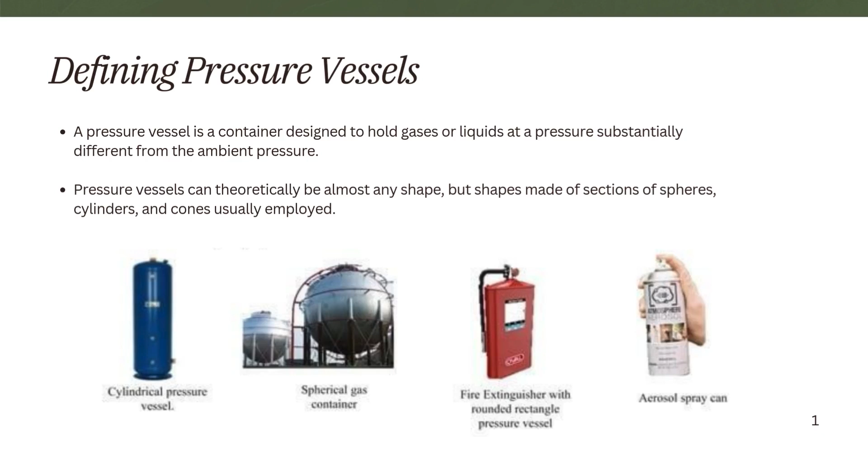A pressure vessel is a container designed to hold gases or liquids at a pressure substantially different from the ambient pressure. Pressure vessels can theoretically be almost any shape, but shapes made of sections of spheres, cylinders, and cones are usually employed.

Pressure vessels are used in a variety of applications in both industry and the private sector. They appear as industrial compressed air receivers and domestic hot water storage tanks. Other examples include diving cylinders, recompression chambers, distillation towers, pressure reactors, autoclaves, and many other vessels in mining operations, oil refineries and petrochemical plants, nuclear reactor vessels, submarine and spaceship habitats, pneumatic reservoirs, hydraulic reservoirs under pressure, rail and road vehicle air brake reservoirs, and storage vessels for liquefied gases such as ammonia, chlorine, and LPG.

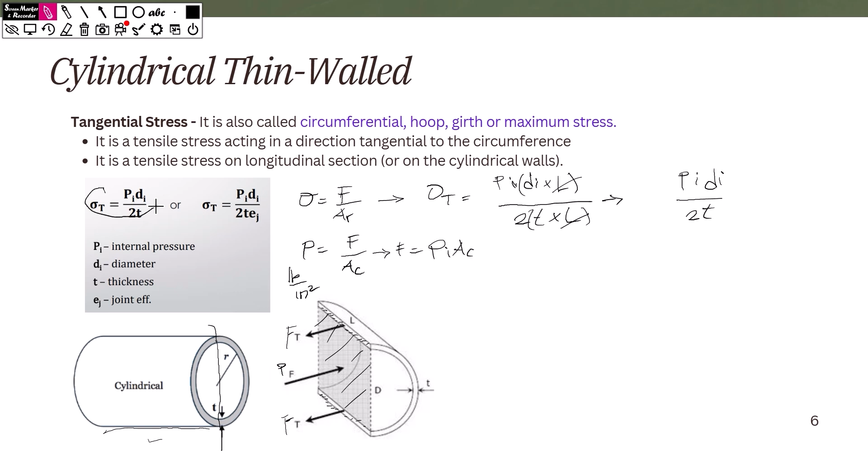Okay, inside diameter times the length, area covered, yung resisting area natin, itong part na to. Kasi ito yung pumipigil, di ba? Ay yung nagre-resist, bago siya masira yung cylindrical vessel natin. So that is 2, dalawang thickness times the length. Thickness times length.

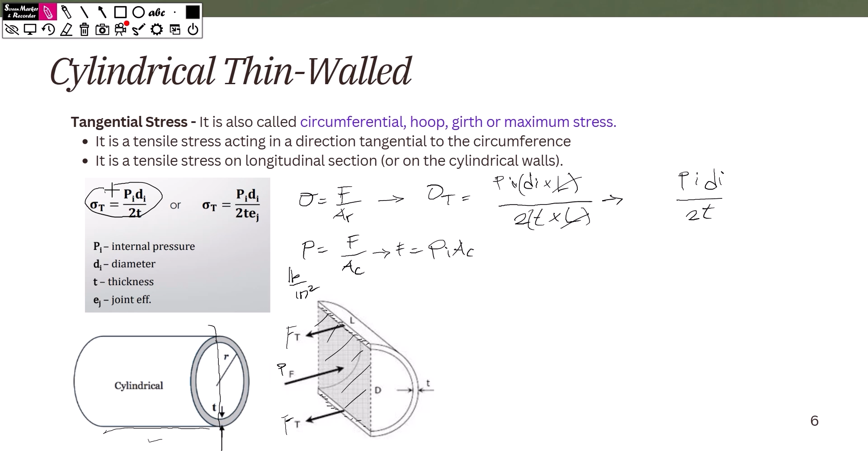So in this case, makikita natin, makakancel lang yung length. Cancel yung length. So matitira formula natin, inside pressure, inside diameter, over 2 times the thickness. So yun yung pinanggalingan ng formula natin na itong part na to. Tangential stress is equal to inside pressure times d, inside diameter, over twice the thickness.

So next tayo. Under cylindrical thin walled pa rin, meron tayong pangalawang stress, yung tinatawag nating axial stress. It is also called diametral, longitudinal, or minimum stress. So kanina, maximum stress yung tangential. Dito sa axial stress, ito yung minimum. Sabi pa rito, it is a tensile stress acting in the direction of the axis or longitudinal to the circumference. It is a tensile stress acting on the transverse or circumferential section or on the ends of the vessels.

So, ito yung formula niya. Kung mapapansin mo kanina, pi d, pressure, inside pressure times diameter over 2t, but this time naging 4t. Kasi ito yung axial niya. So, axial, ibig sabihin dito, sa part na to. Okay, sa part na to. So, kung kanina, nahati siya rito under ng tangential. In this case, ang hati natin dito sa part na to. Okay? So, ito yung kalalabasan niya.

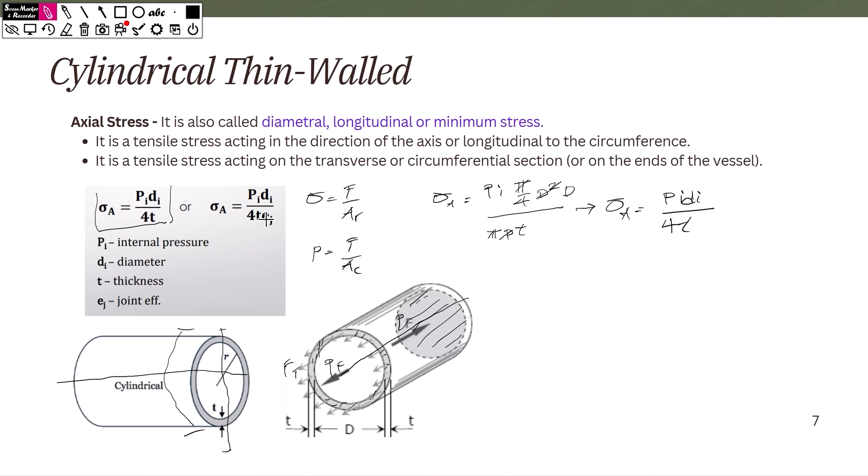So ito yung resisting area natin, di ba? Itong circumference na to, yung part na yan, circumference lang yan, that is pi d, inside diameter times the thickness, para makuha natin yung resisting area, di ba? Now, pero kakancel lang itong isang d, cancel itong isang d, may matitirang isang d, cancel itong pi. Therefore, formula natin dyan, axial stress is equal to inside pressure, inside diameter, lagyan natin dyan yung 4, pupunta sa baba, at then yung t. So yun yung pinanggalingan ng formula natin, that is axial stress.

Okay, and again, if may joint efficiency na binigay, ilalagay lang natin siya sa divisor. But kapag wala, assume lang natin ulit na 100%.

So next tayo, spherical thin walled. Kung kanina nasa cylinder tayo, ngayon nasa spherical. So stress of spherical vessel, sabi dito, the tangential stress in a spherical vessel is also equal to its axial or longitudinal stress. So ibig sabihin pala, ito kasing bilog, saan ba siya masisira itong sphere? Sabihin na natin dito, kahit dyan mo siya ikat, kahit pag ganito mo siya ikat, okay, kahit pag ganito mo ikat, kahit anong cut yung gawin mo dyan, ito pa rin yung lalabas.

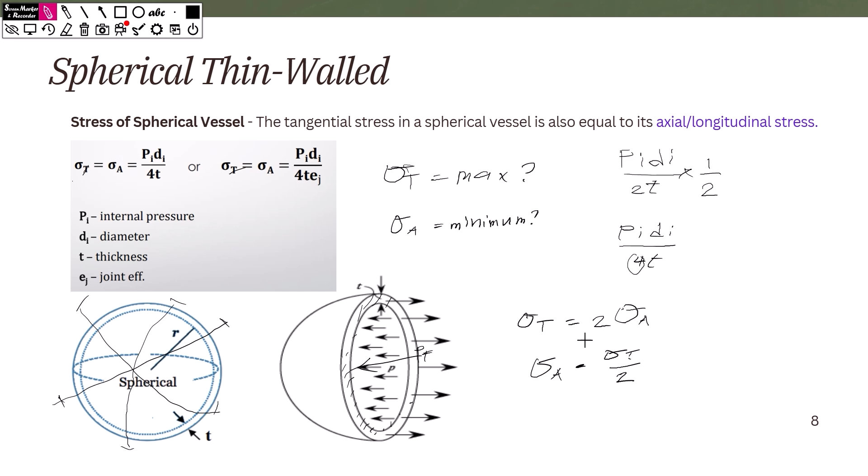Wait lang. Papapansin mo pala, bakit sir? Bakit po yung thickness ay yung tangential? Bakit yung tangential ay maximum? Bakit siya maximum stress? Tapos yung longitudinal o yung axial minimum stress, di ba? Minimum, bakit siya minimum? Tingnan natin, tama ba? Sabi si axial yung minimum, tangential yung maximum. So bakit ba? Bakit naging ganon? Diba ang formula ng tangential is inside pressure, inside diameter over 2t. Eh yung axial, inside pressure, inside diameter over 4t. So kung mapapansin mo, si tangential pala...

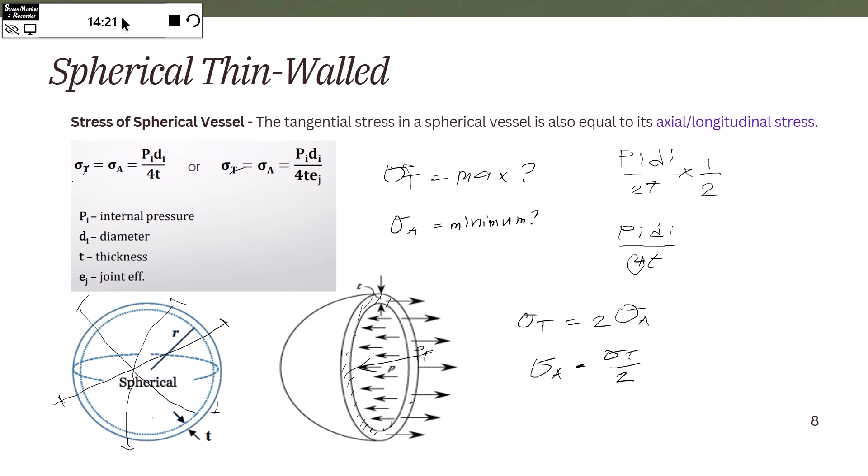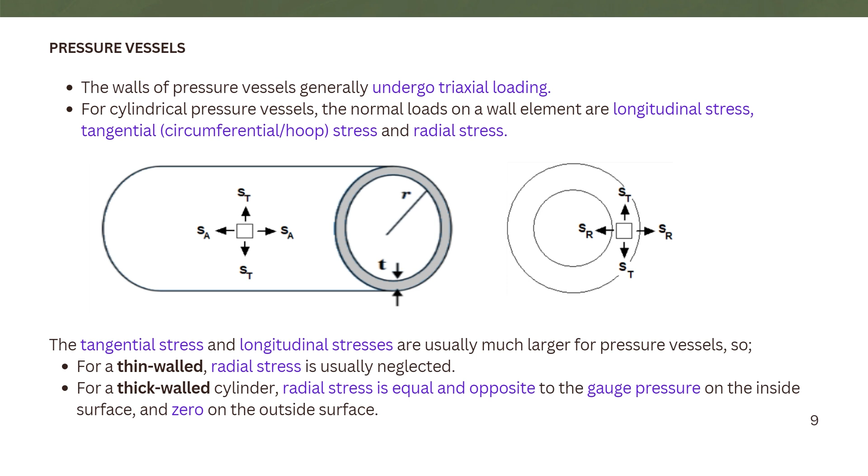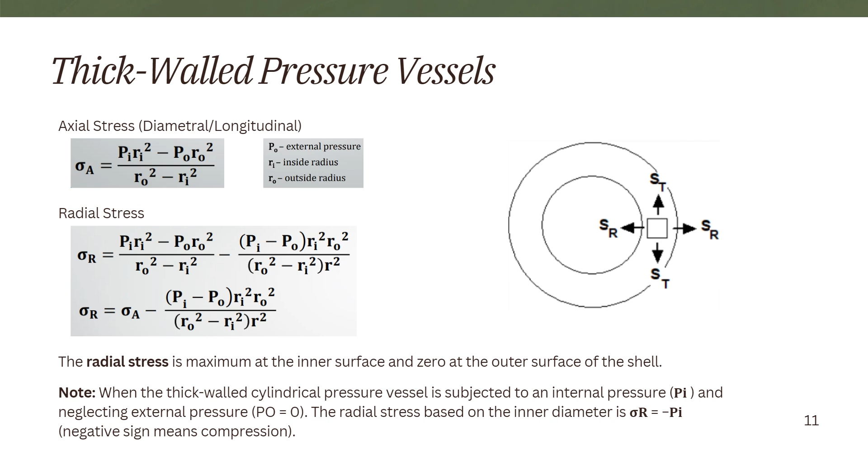For tangential stress, also called circumferential, hoop, or girth stress, it's the same as radial stress, but this time, instead of subtracting, we add the formula of axial stress.

So the formula for axial stress, plus internal pressure minus external pressure, times inside radius squared times outside radius squared, all over outside radius squared minus inside radius squared, times r squared.

Same as before, the r depends on the problem, on what is given or what is desired — either internal tangential stress or external tangential stress. That's what it depends on, okay?

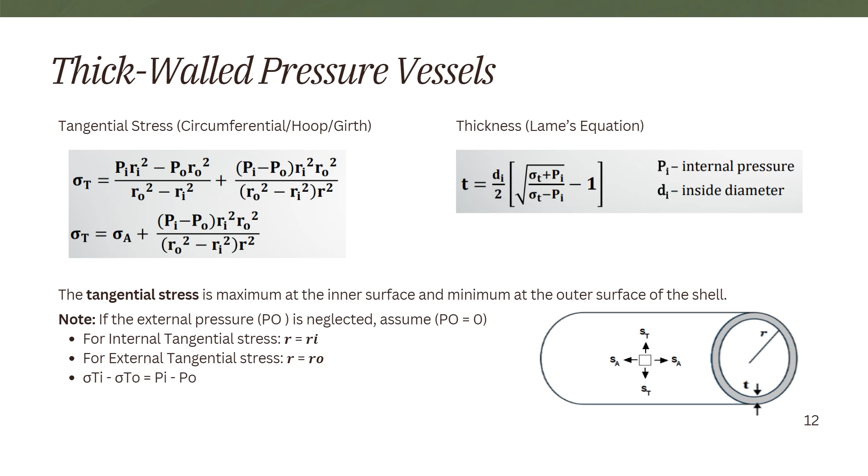So, sample problem number 1, let's try this. The wall thickness of a 4 feet diameter spherical tank is 5/16 inches. Calculate the allowable internal pressure if the stress is limited to 8,000 psi.

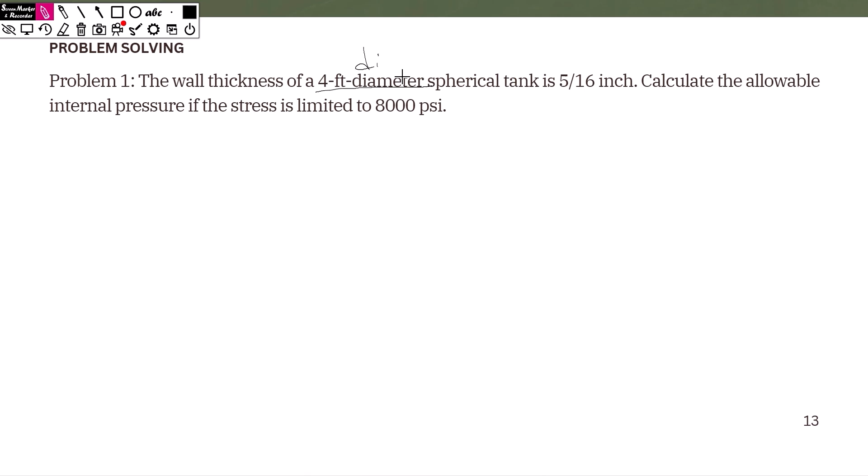We were given a 4 feet diameter, which is the inside diameter of the spherical tank, with a thickness of 5/16 inches. We need to find the allowable internal pressure, given the spherical stress.

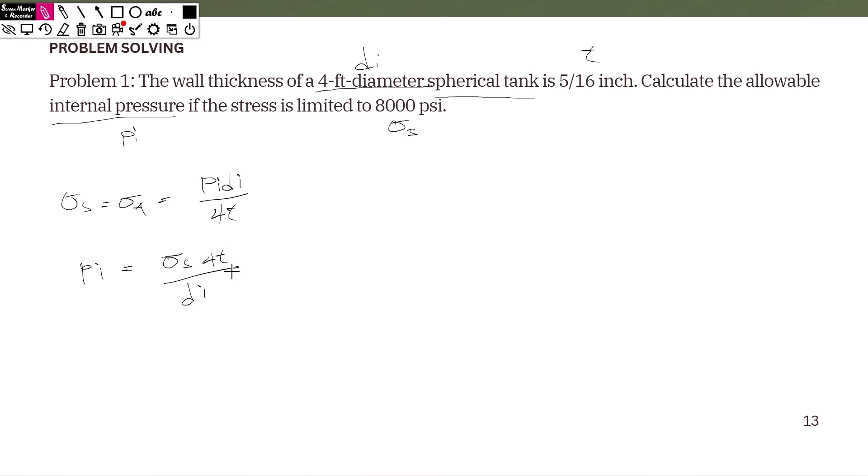Let's solve. We know the formula for spherical stress is the same as for axial stress: internal pressure times inside diameter over 4 times thickness. Rearranging to isolate internal pressure, we get spherical stress times 4 times thickness, over the inside diameter.

Let's substitute the given values: 8,000 psi times 4, times the thickness of 5/16 inches, all over the inside diameter of 4 feet. Let's convert — 1 foot equals 12 inches — so the feet units cancel, the inches cancel, leaving psi, which is what we're solving for.

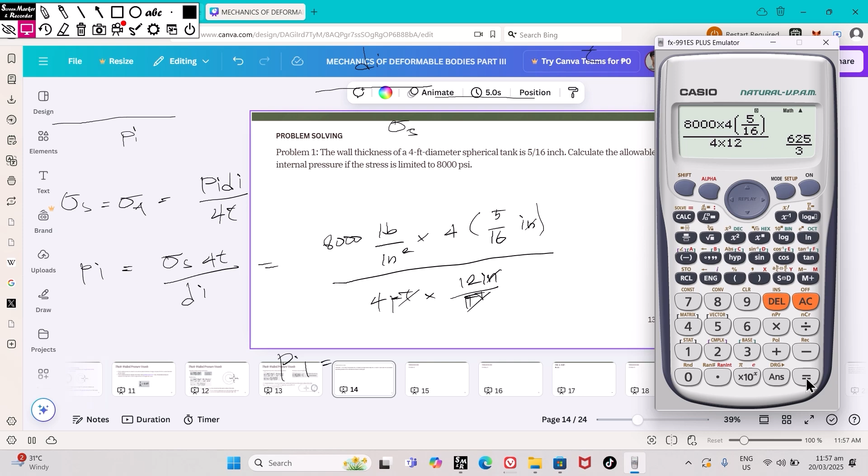Internal pressure equals, let's calculate: 8,000 psi times 4, times 5/16 inches as the thickness, times 12 for the inside diameter. Our answer is 208.33 psi.

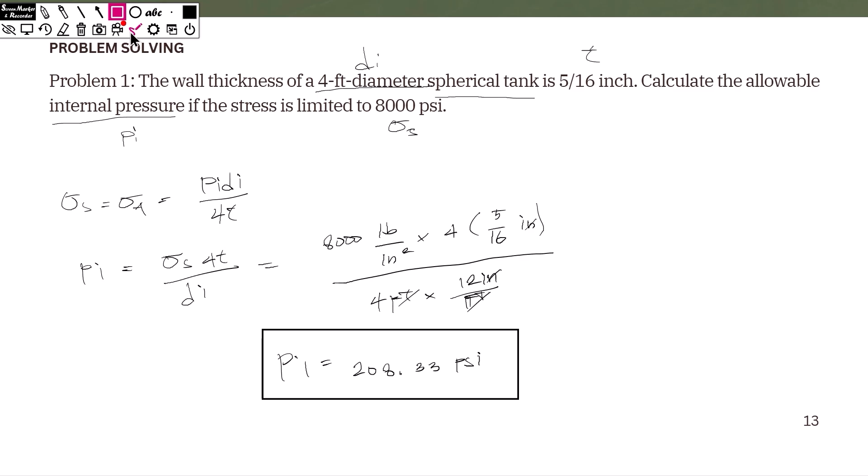So this vessel is to carry a gas at a pressure of 1,400 psi. The diameter of the vessel is 2 feet and the stress is limited to 12 ksi.

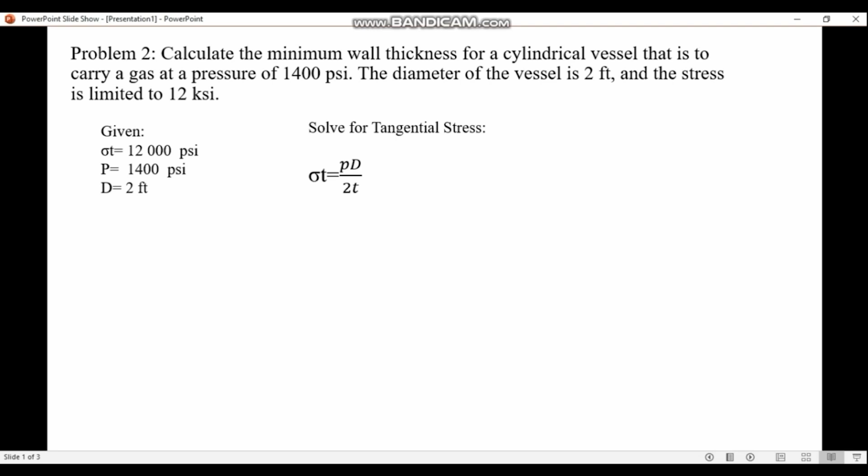The thickness. So where can we get the thickness? We can get it from the formula for tangential stress, which is this: tangential stress equals pressure times diameter over 2t. Okay, so it's just substitution.

So, 12,000 pounds per square inch equals 1,400 pounds per square inch times 2 feet. Now I converted the 2 feet into inches so the units cancel: 2 feet times 12 inches, over 2t. And that's how we find the thickness. So let's just solve using the formula.

So, 12,000 is equal to 1,400 multiplied by 2 feet. Convert the length into inches.

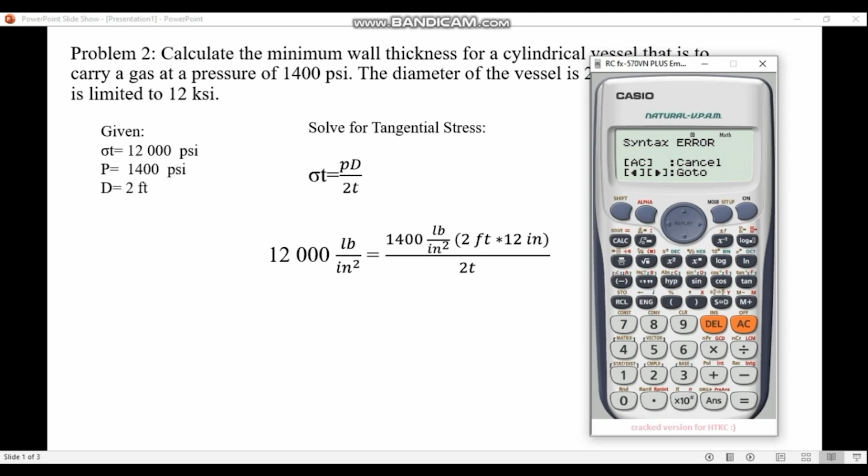Let's check. Thickness is 1.4 inches. Into the next slide. Okay.

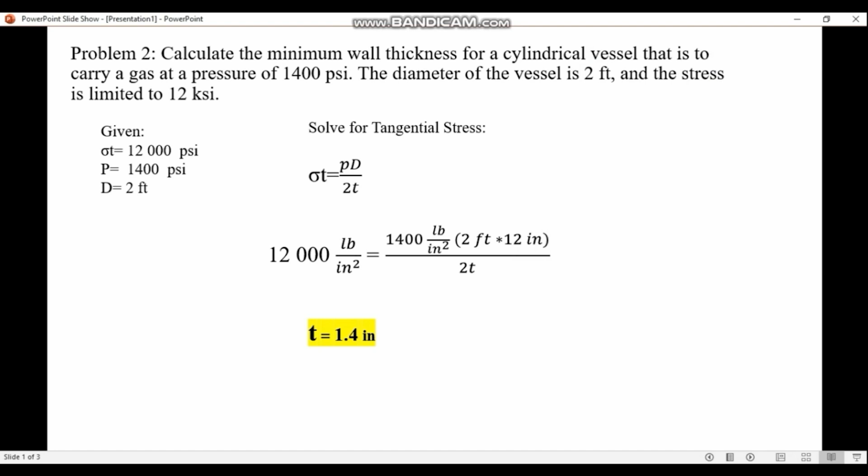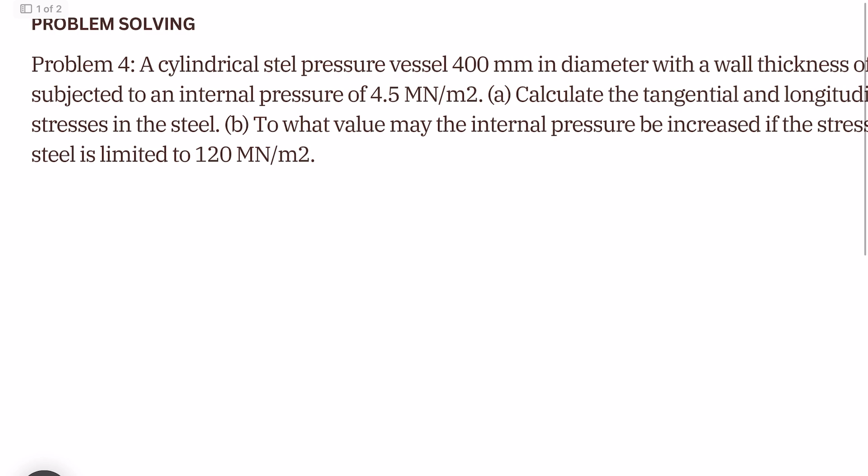For problem 4: a cylindrical steel pressure vessel 400 millimeters in diameter with a wall thickness of 20 millimeters is subjected to an internal pressure of 4.5 meganewton per meter squared. Calculate the tangential and longitudinal stresses in the steel, and then to what value may the internal pressure be increased if the stress in the steel is limited to 120 meganewtons per square meter.

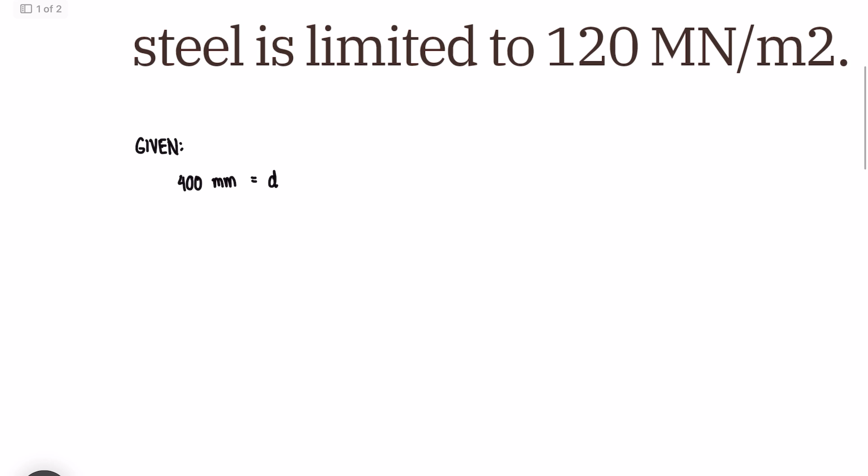First, let's write the given: 400 millimeter diameter, with thickness of 20 millimeters, and an internal pressure of 4.5 meganewton per square meter.

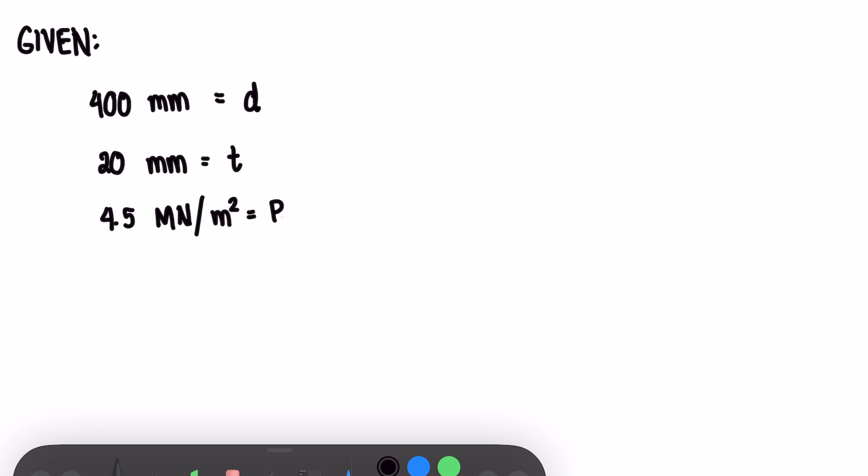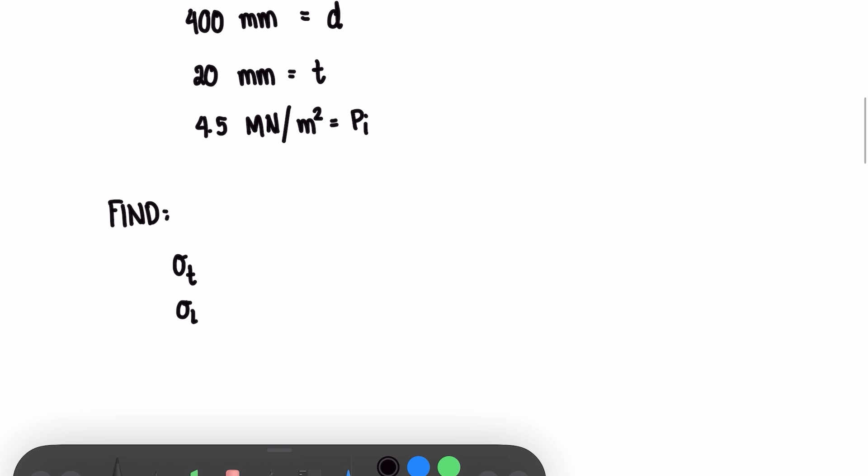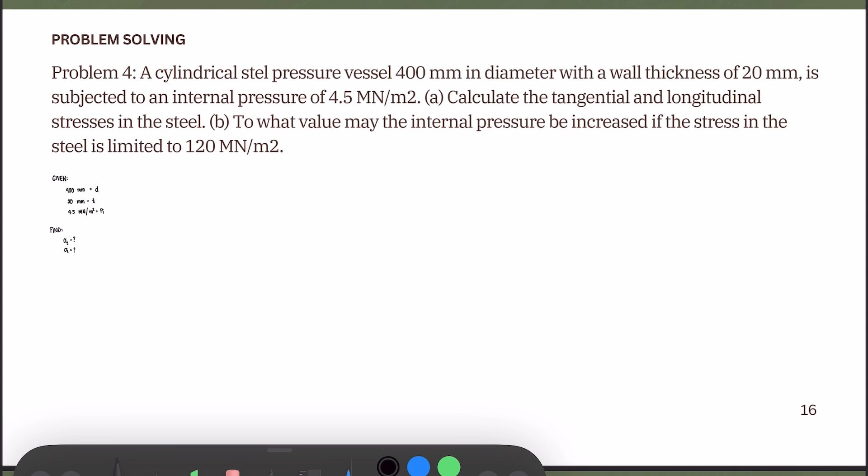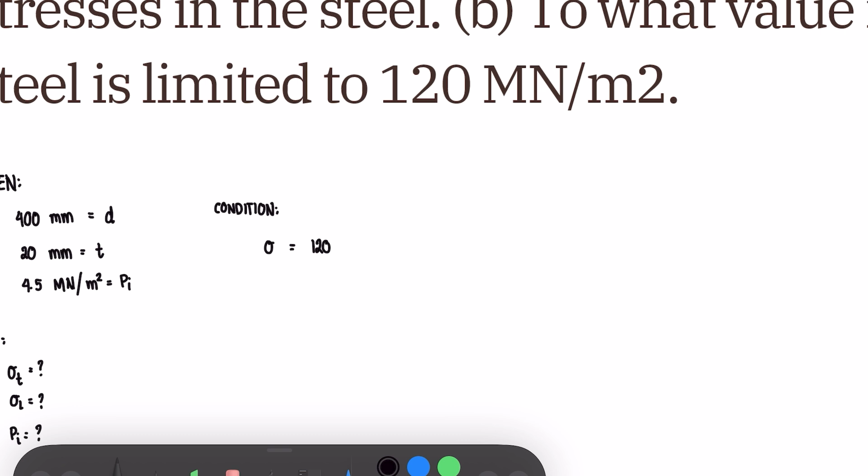We need to find the tangential stress and longitudinal stress. We have our unknowns, and there's another condition, which is letter B, asking for the internal pressure when the stress is 120 meganewton per square meter.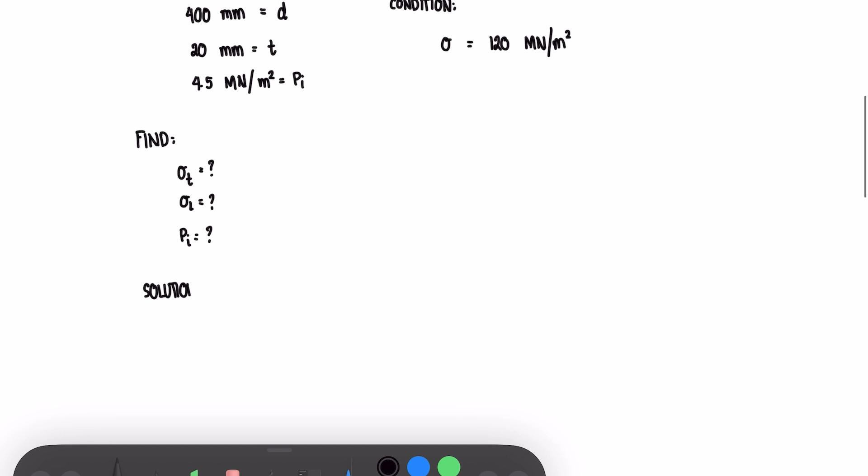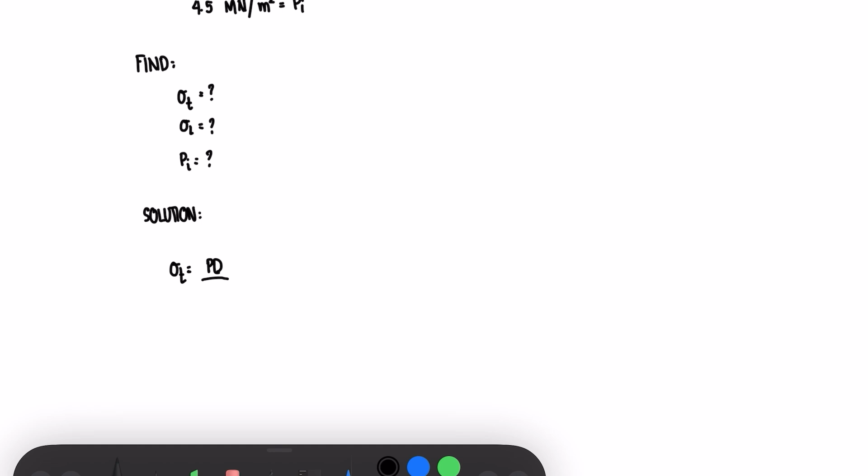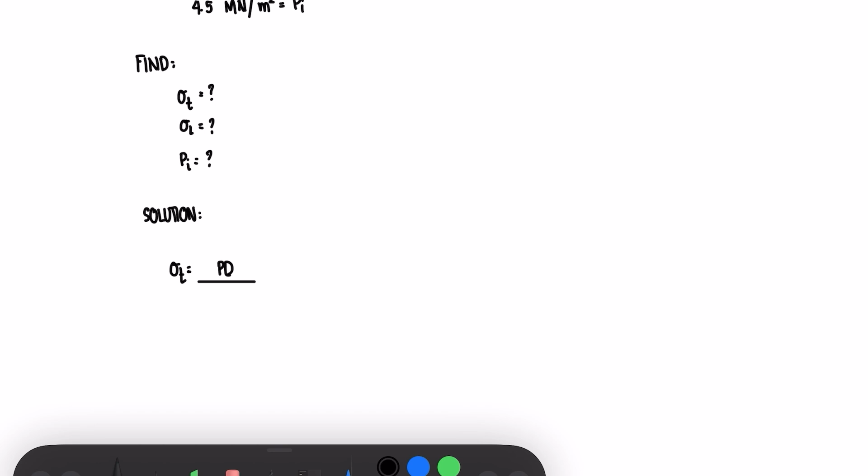For the solution, tangential stress is equal to pressure times diameter all over 2t. Our pressure is 4.5 times 400 all over 2 times 20. Let's calculate: 4.5 times 400 all over 2 times 20. The answer comes out to 45. So we have 45 megapascal for the tangential stress.

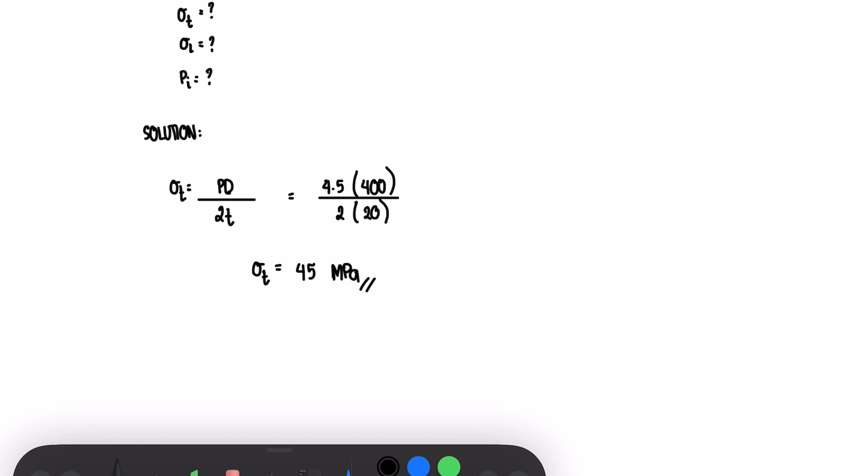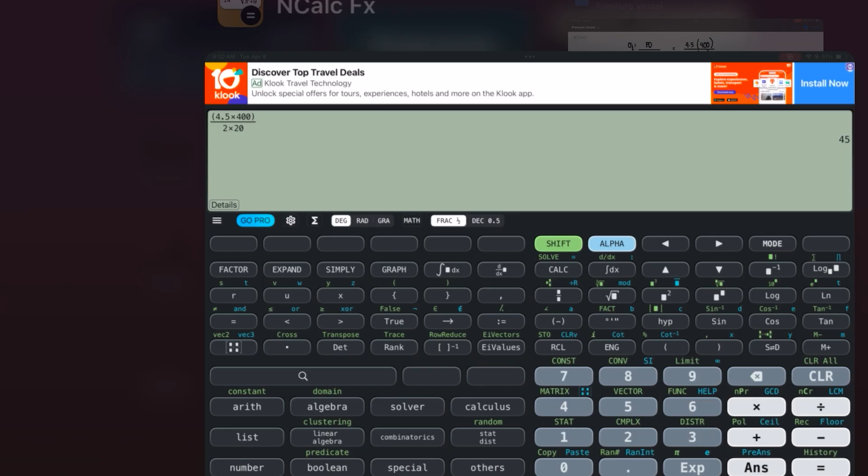For longitudinal stress, PD over 4T, so pressure times diameter over 4 times thickness. So 4.5 times 400 all over 4 times 20. Let's calculate again: 4.5 times 400 all over 4 times 20, the answer is 22.5. So for the longitudinal stress, we have 22.5 megapascal.

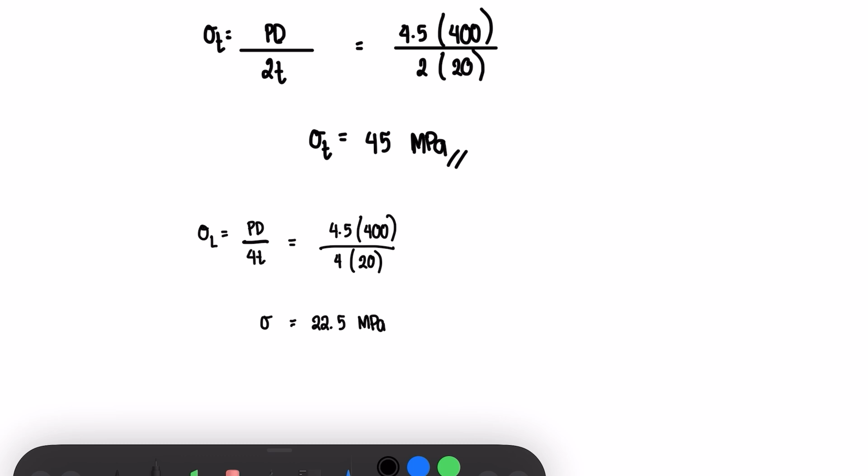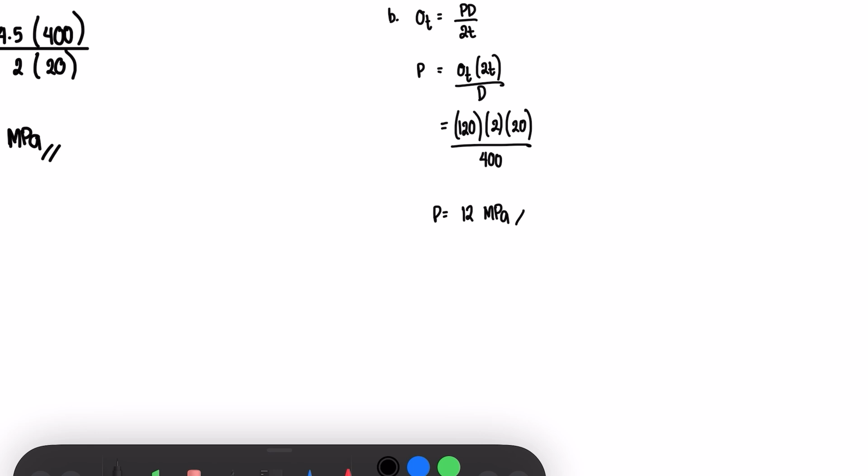For the condition, we have tangential stress equals pressure times diameter all over 2 times thickness, PD over 2T. But in that condition, the stress is given, not the pressure. So by derivation, let's isolate P first. Once isolated, we get the formula P equals stress (tangential stress) times 2 times thickness all over diameter. Input into the calculator: 120 times 2 times 20 all over 400. The answer comes out to 12. So for that condition, with 120 meganewton per square meter stress, the pressure will be 12 megapascal.

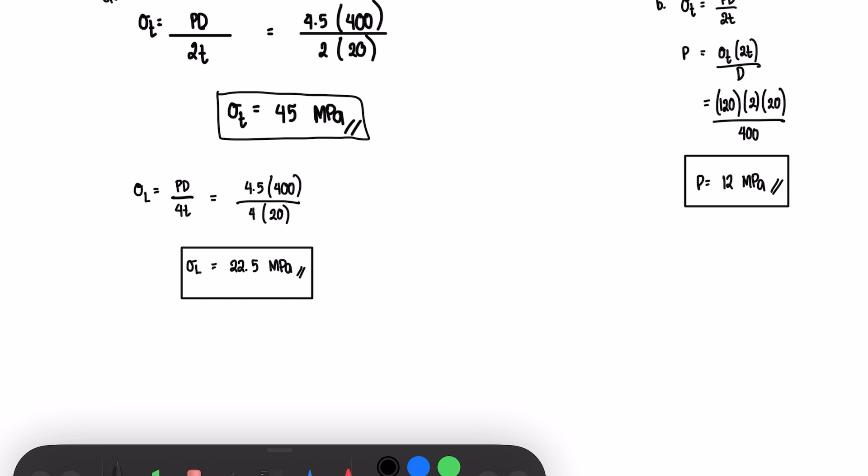For problem 5: a pipe carrying steam at 3.5 megapascal has an outside diameter of 450 millimeters and a wall thickness of 10 millimeters. A gasket is inserted between the flange at one end of the pipe and a flat plate used to cap the end. What circumferential stress is developed in the pipe?

So let's write the given: pressure is equal to 3.5 megapascal, outside diameter is 450 millimeters, and wall thickness of 10 millimeters.

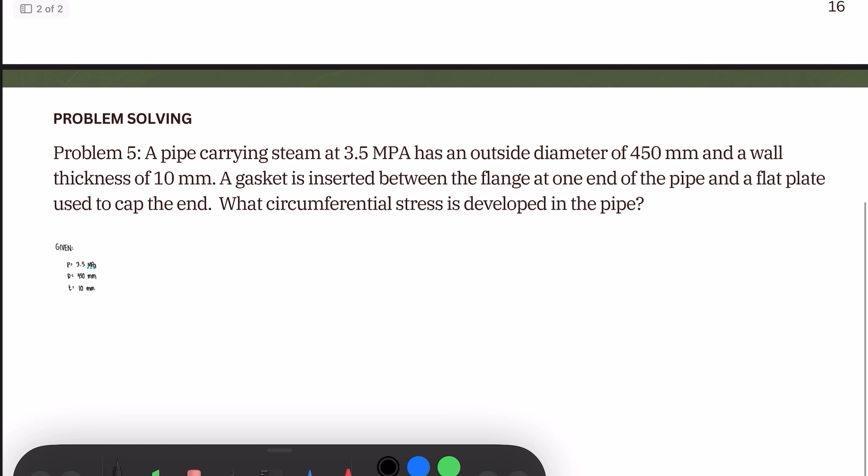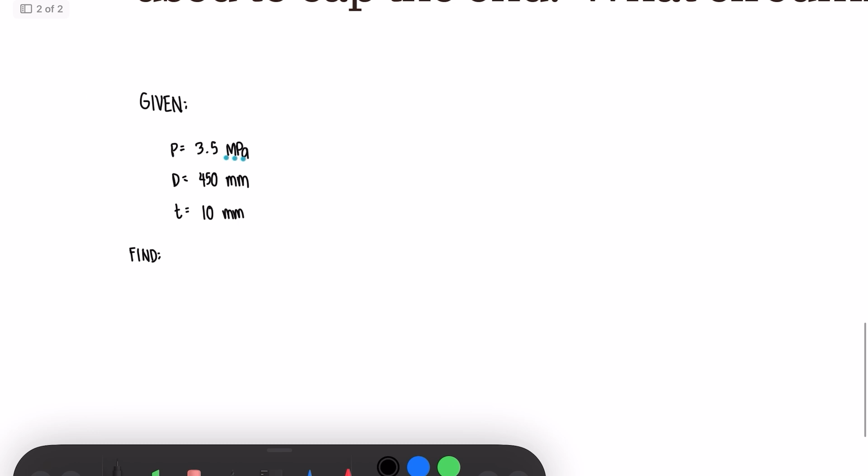The unknown we need to find is the circumferential stress. So let's proceed to the solution. The basic formula for force is force equals pressure times area.

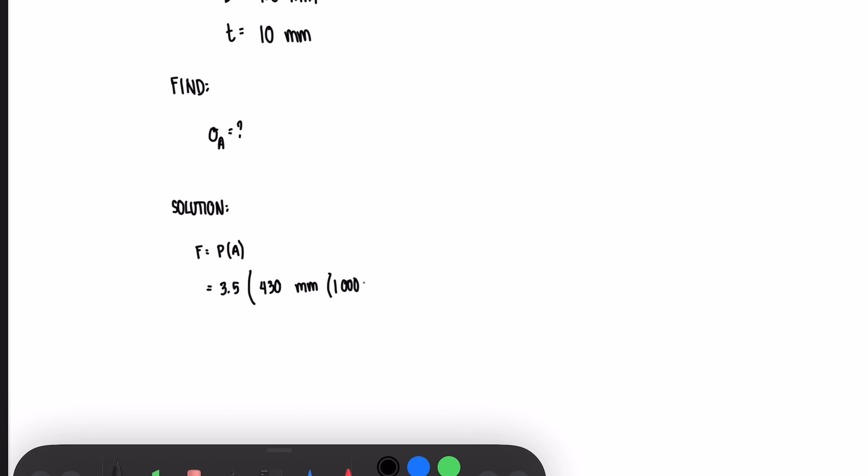The pressure given is 3.5 megapascal. For the area, let me draw this out. Since the thickness at the sides is given as 10, and it's the same on both sides, we deduct 20 from the diameter. So we get 430 millimeters, and we assume a base of 1 meter.

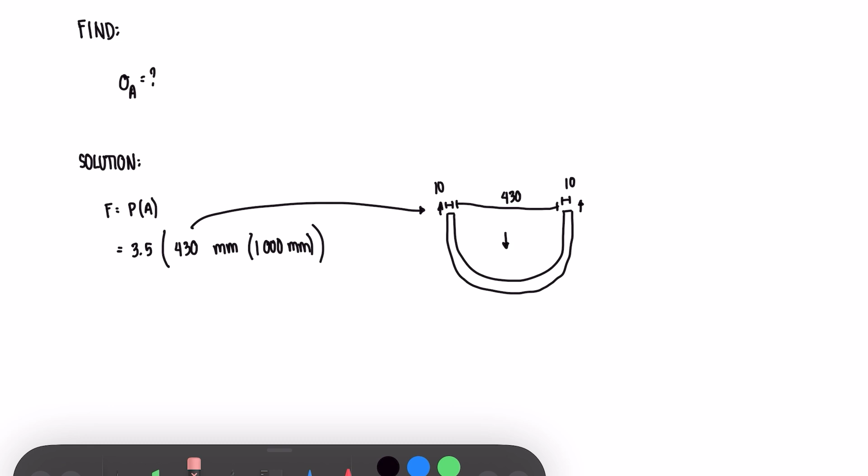So input into the calculator: 3.5 times 430 times 1,000 equals 1,505,000 Newton.

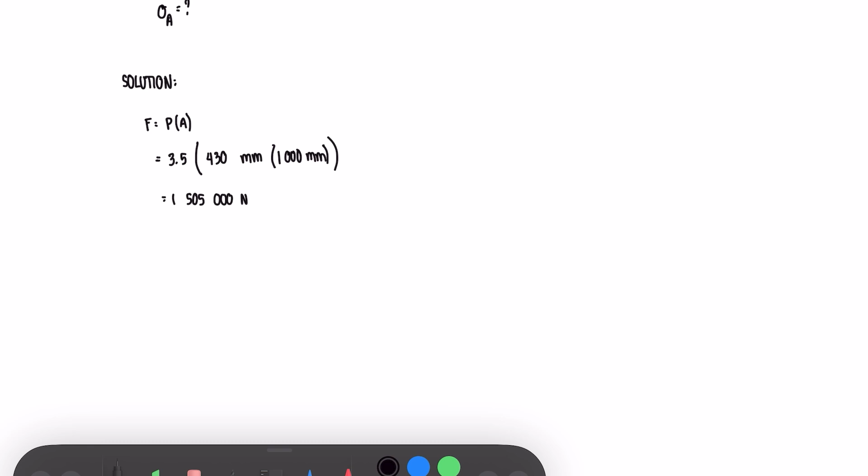Next, another formula is F equals 2 times T. Since the tangential stress is not given, what likely needs to happen here is derivation again. So let's isolate the stress.

Input into the calculator: 1.505 million over 2 times 1,000 times 10. The answer becomes 75.25. So we have 75.25 megapascal as the tangential stress.

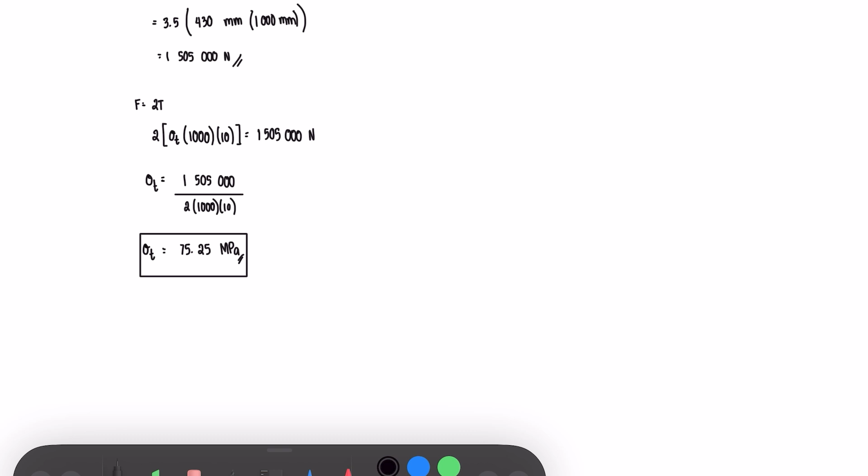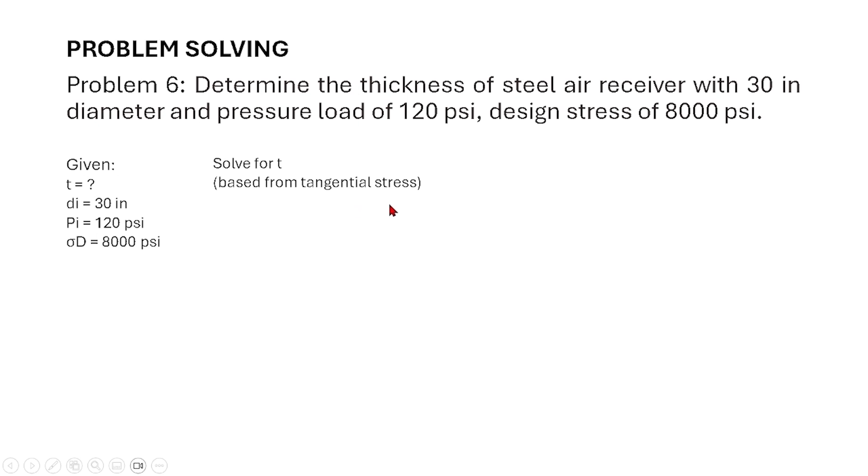So we'll get this from the tangential stress and axial stress formulas for thickness. For tangential stress, the formula is stress tangential equals pressure multiplied by diameter over 2 times thickness. Let's isolate the thickness. It can be derived into this formula. Then we substitute the given values.

Pressure is 120 pounds per square inch or PSI, multiplied by diameter of 30 inch, over 2 multiplied by tangential stress of 8,000 PSI. Let's compute: 120 multiplied by 30 over 2 multiplied by 8,000. The PSI units cancel out since they're the same, leaving inch to get the thickness.

So the answer is 0.225.

For axial stress, the formula is axial stress equals pressure multiplied by diameter over 4t. If tangential is 2t, for axial it's 4t. So again we isolate the thickness since that's what we're looking for. Only the 4 is different here. Let's solve this.

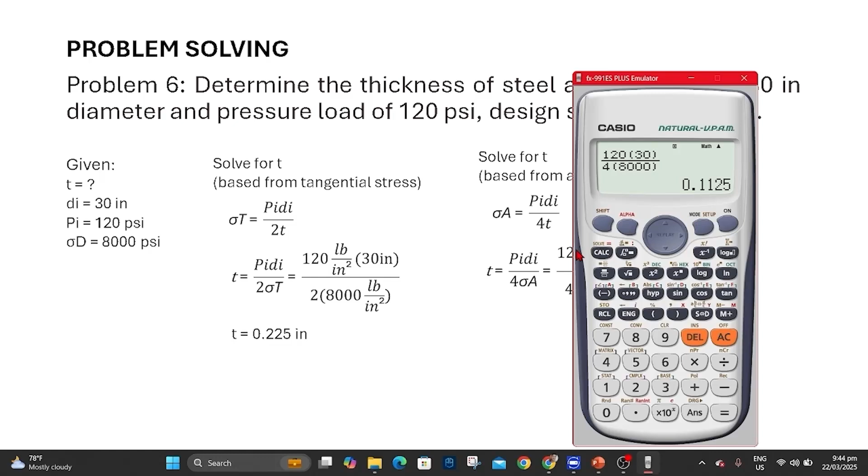Problem 7: A spherical shell of 1.8 meter outside diameter and 1.725 meter inside diameter contains helium at a pressure of 10.4 megapascal. Compute the tangential stress in the shell. Given: outside diameter of 1.8 meter and inside diameter of 1.725 meter, and pressure of 10.4 megapascal. What we need to find is the tangential stress in the shell.

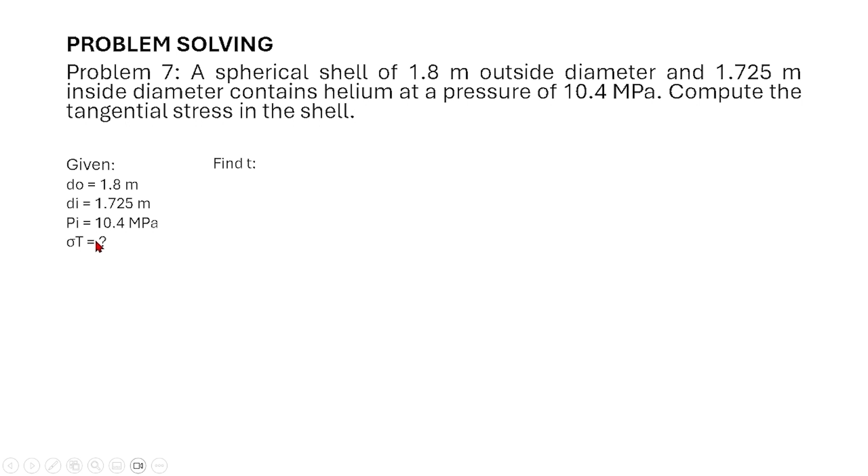That's what we need to find. So let's find the thickness first so we can use the formula. The formula is thickness equals outside diameter minus inside diameter over 2. Let's substitute the given values, converting to millimeters: 1,800 millimeters and 1,725 millimeters over 2. That's the answer, should we compute it further?

Let's double check. So 1,800 minus 1,725 over 2. There, 37.5 millimeter.

Now let's solve the tangential stress, using the same formula as Problem 6 earlier. Tangential stress equals pressure multiplied by inside diameter over 2t. We substitute the given values: pressure, then the inside diameter in millimeters, since the pressure is given in MPa which becomes Newton per millimeter squared, so we convert meter to millimeter. The thickness we got earlier goes here too.

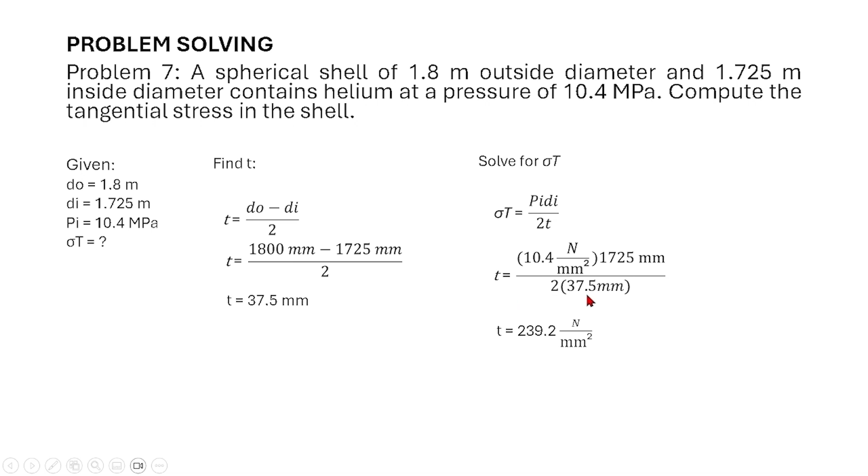Let's solve it and check if our answer is correct. So 10.4 times 1,725 over 2 times 37.5. Let's look at it this way: 239.2. The millimeter units cancel out between the inside diameter and thickness, leaving MPa.

That's the answer. Next is Problem 8: A cylindrical vessel with a diameter of 36 inch, length of 84 inch, thickness of 1/4 inch, has two hemispherical ends, considered AISI 301, 1/4 hard stainless steel, with SY of 75 KSI as the vessel material, with a relative strength of 80% as its welded joint, using a factor of safety of 3.5. Based on the yield point, determine the maximum pressure in PSI that the vessel can contain.

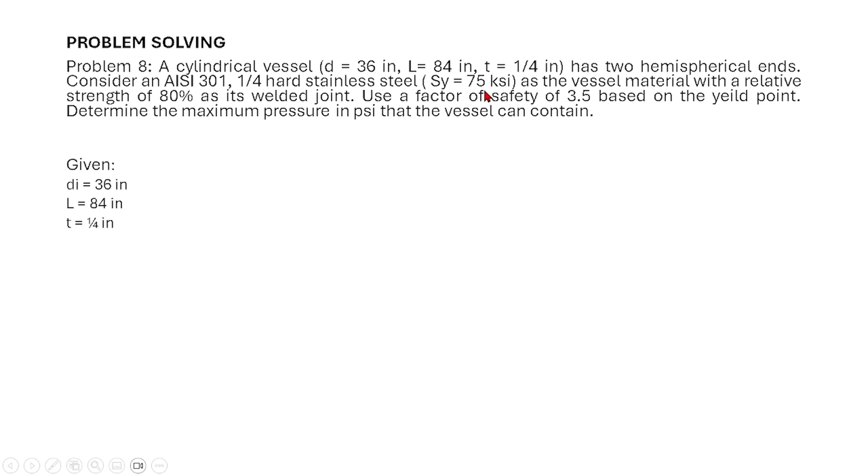Given: diameter of 36 inch, length of 84 inch, thickness of 1/4 inch, SY of 75 KSI, relative strength of 80%, and safety factor of 3.5. What we need to find is the maximum pressure in PSI that the vessel can contain.

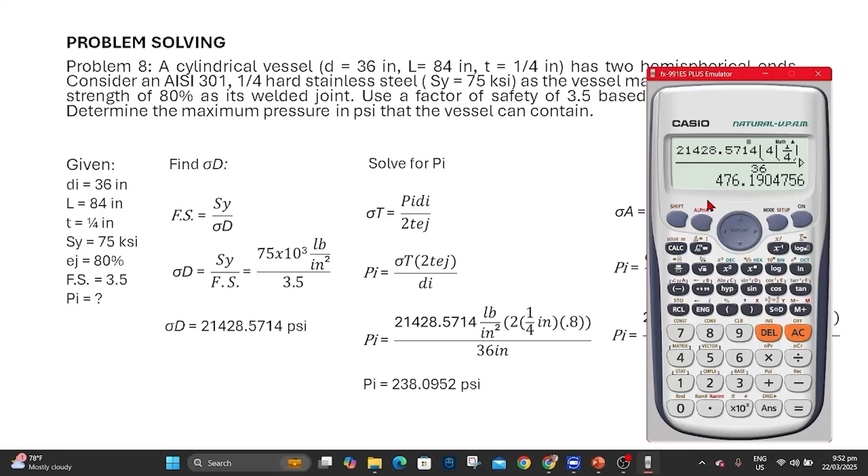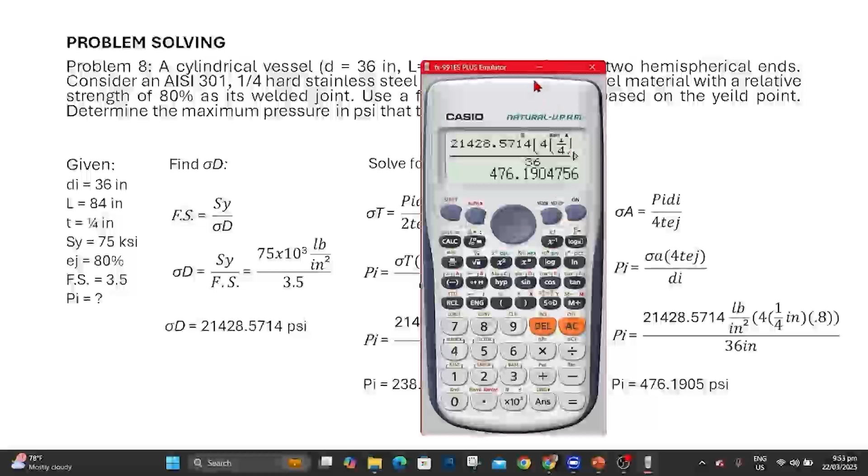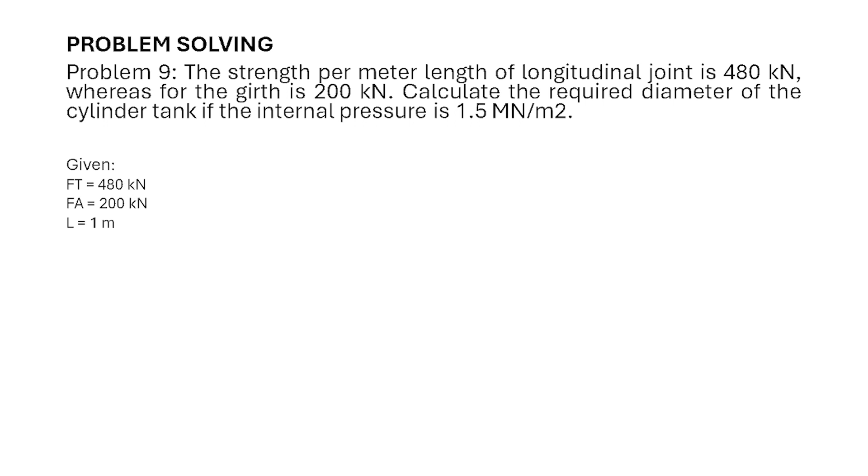Problem 9: The strength per meter length of longitudinal joint is 480 kN, whereas for the girth it is 200 kN. Calculate the required diameter of the cylinder tank if the internal pressure is 1.5 meganewton per square meter. Given: longitudinal joint of 480 kN, girth of 200 kN, length, and pressure of 1.5 meganewton per square meter. What we need to find is the required diameter.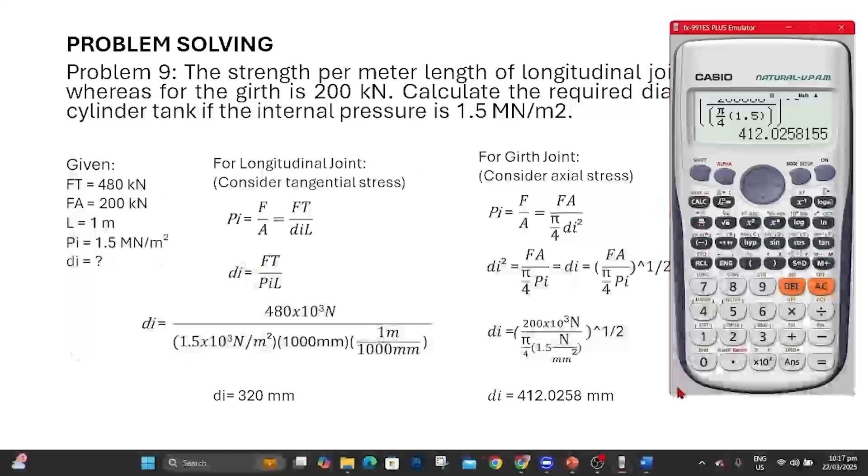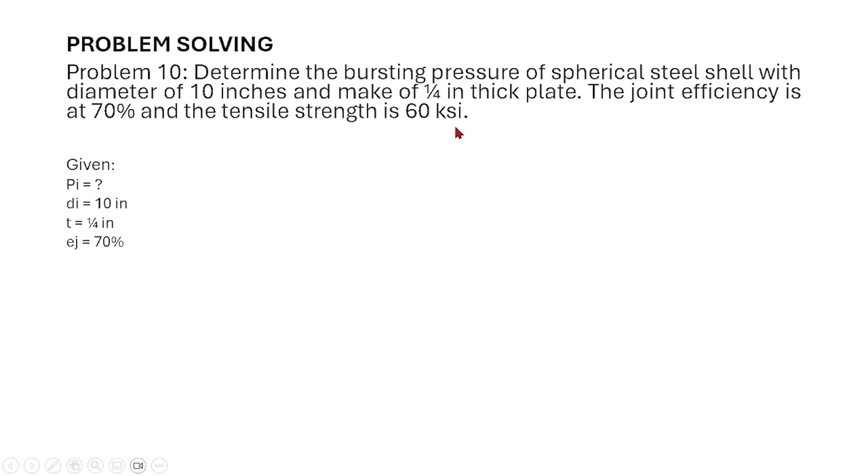Problem 10, last problem. Determine the bursting pressure of a spherical steel shell with a diameter of 10 inches, made of 1/4 inch thick plate. The joint efficiency is 70% and the tensile strength is 60 KSI. Given: what we need to find is the bursting pressure. The diameter is 10 inches, thickness is 1/4 inch, joint efficiency is 70%, and tensile strength is 60 KSI.